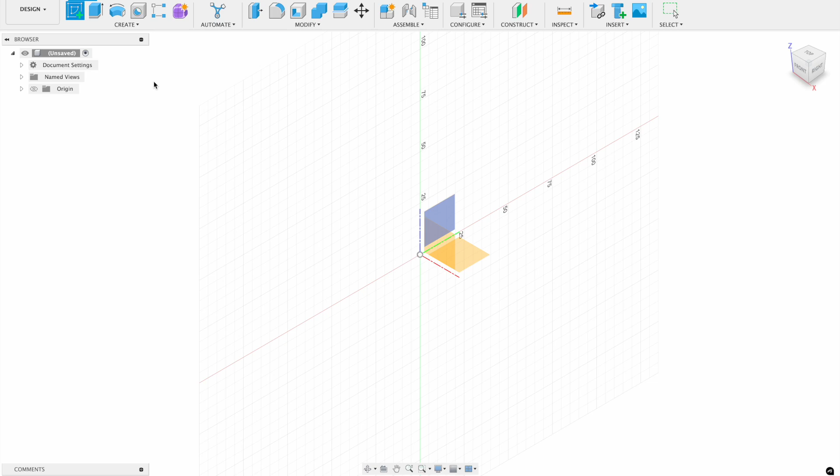So what we'll do is in Fusion, we will start by clicking the Create Sketch, and this time we'll select our side plane right here.

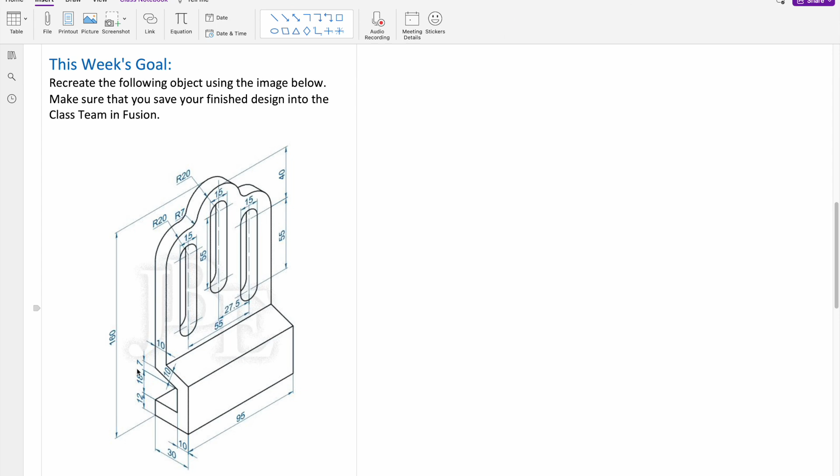Now what we want to do is using the Line Sketch tool, we want to start by just sketching this little profile right here. It doesn't have to be perfect just yet. We can come back in and add the dimensions that we need. But we'll start by just kind of starting at the top, goes down, comes down at a slant, and then makes this funky looking little shape right here.

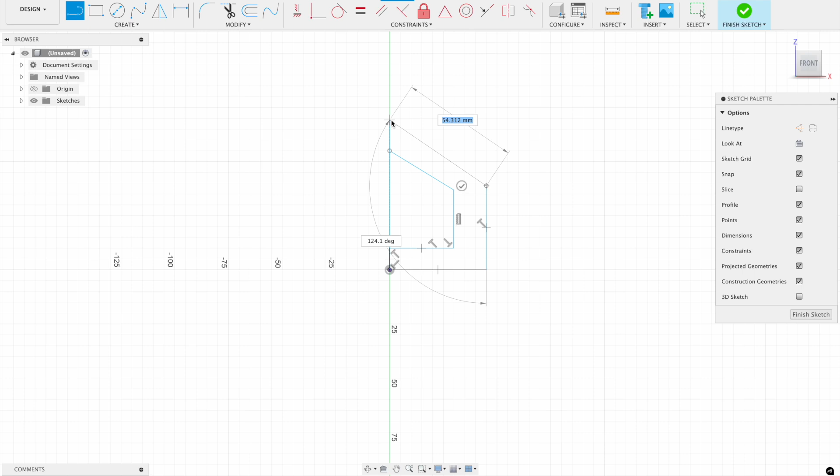This isn't perfect to the design by any means, but we have a good frame of reference to start. So if we're looking at this picture here, we see we have some dimensions along our side: a 12 from this edge to this edge, an 18 from this edge to this corner, and 7 from this corner to this edge right here.

So the first thing we actually want to do is lock this corner to be in line with this edge. To do that, we could start with the construction line and make sure you click in the bottom left portion to anchor the line.

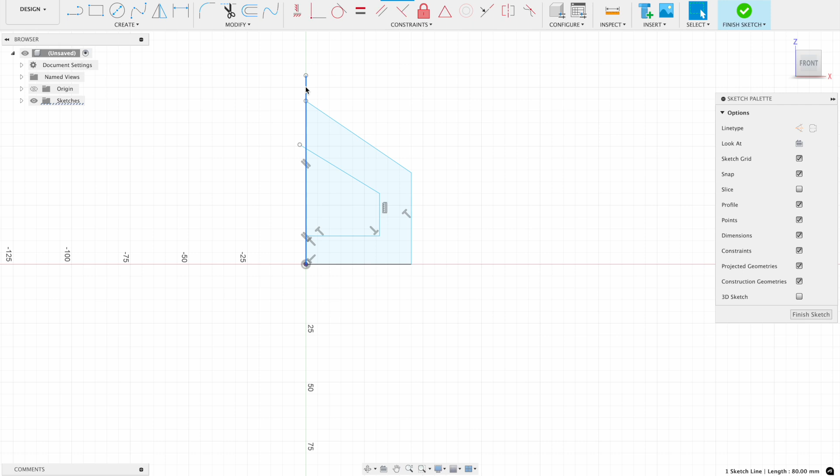Now you see we have a fully defined line here, but we're actually going to make this a construction line. We'll click here on the line and then press the X key on our keyboard to turn it into a dotted line. Then we could use the coincident constraint to lock this portion of our line. If we click on that dot in this line, we'll see that they snap together. So now no matter what dimension we put in, this line will always be snapped to our little reference line that we made.

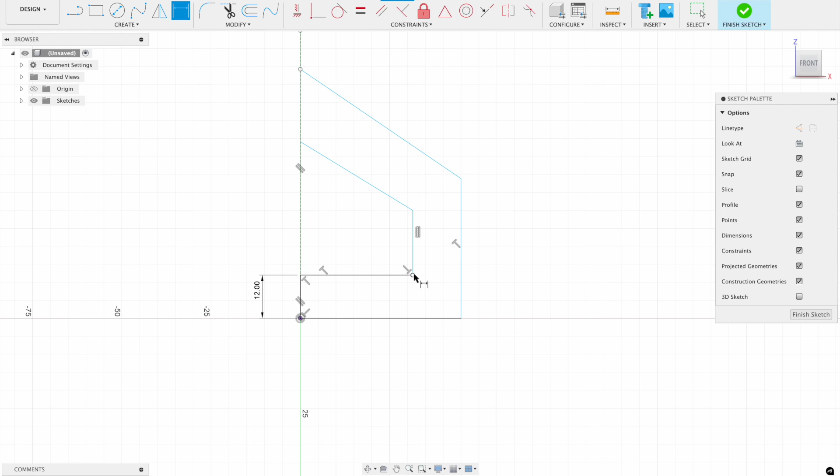Now we could come back in and add our dimensions that we need. We saw that this dimension from here to here was 12 -- we already have that in. This dimension from here to here was 18. And from this dimension to this dimension, we can come back in and just make this 7. Now you see the angle adjusted, but our distance from this corner to this line stayed the same.

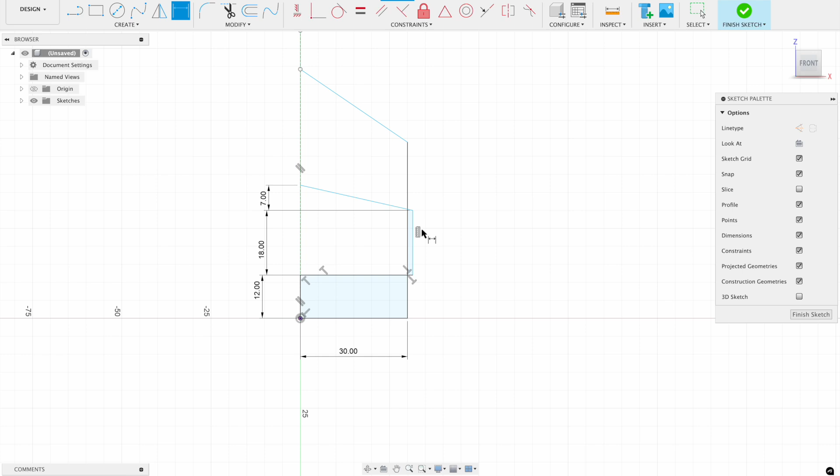So what we can do now is come over to our bottom portion of the line. We can see this entire length is 30, and this little section of the L is just 10. So we'll make from here to here 30. That kind of messed up our shape a little bit, so before we do that, we will come back and delete this dimension, and just adjust this to make this dimension 20 to start. Now when we come back in and make this 30, it's a lot easier to reference that.

So the last thing we need to do is give these lines here their correct spacing, because right now these look way off from the way they're supposed to be. First we'd want to add a parallel constraint to these two lines -- we could see visually that these two lines, since they have a dimension of length in between them, are parallel. If these dimensions were at different angles, they would have an angle dimension there instead of a distance. So we could come in and add a parallel constraint to these two lines.

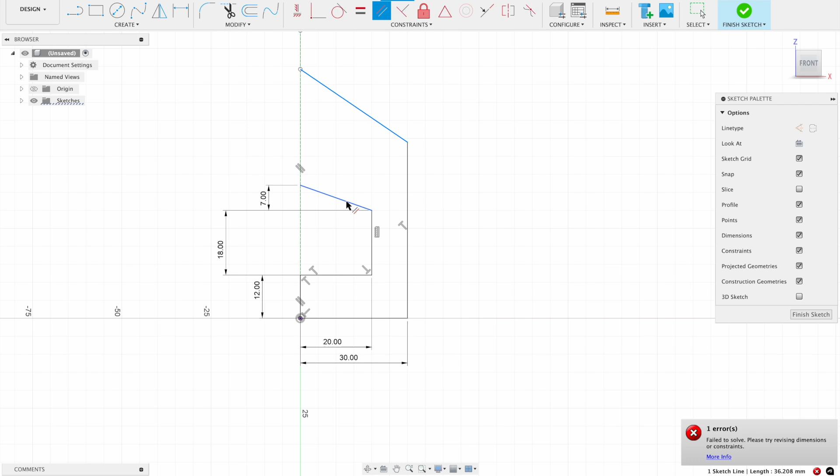Then we can come in and lastly just add a dimension from here to here, making sure we get our dimension at that slight angle and make this 10. Now you see we've kind of got this little jut out, but that's okay, because what we can do is just draw an arbitrary line from here to this little corner to close off our shape.

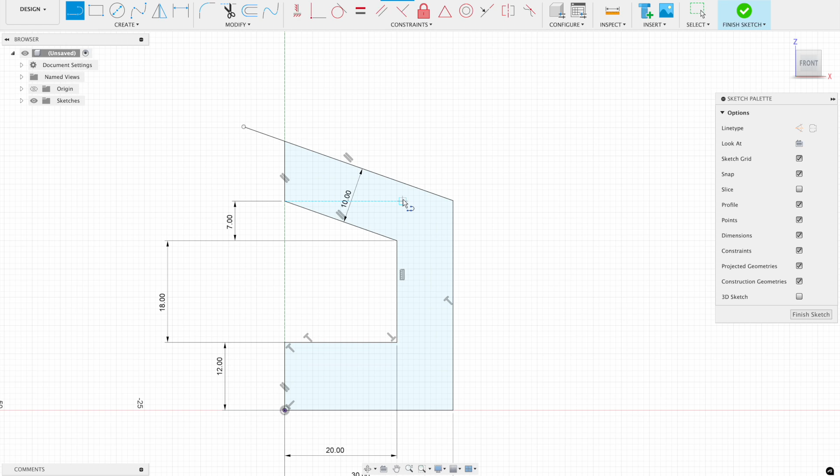Okay, now we have a fully defined shape, and we can come in and actually use the trim tool here and modify it with a little trim.

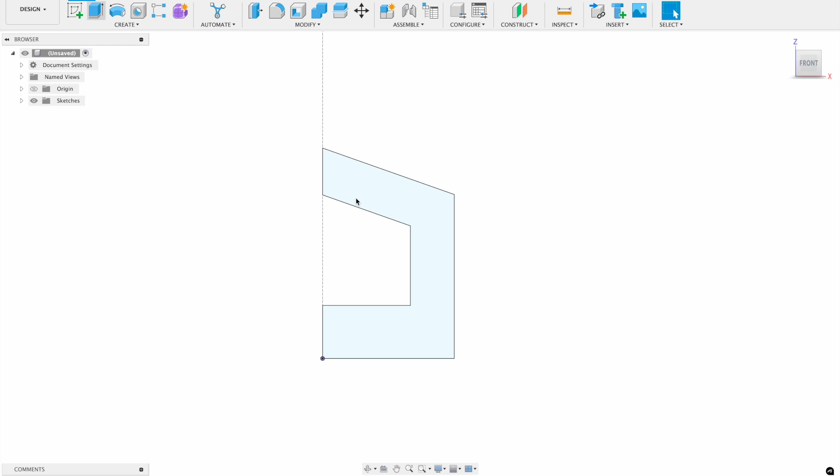Now we have the exact shape for our thing fully dimensioned out, so we are good to do our first extrusion. We'll finish the sketch, and if we look back at our drawing, we see that this whole thing gets extruded out 95 units. So we'll click on extrude, click on this little guy here, and extrude that out 95 units. That's the first part of our object.

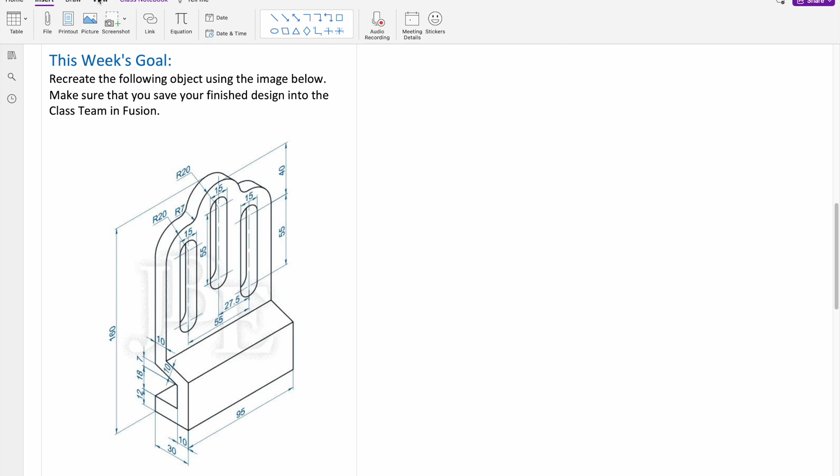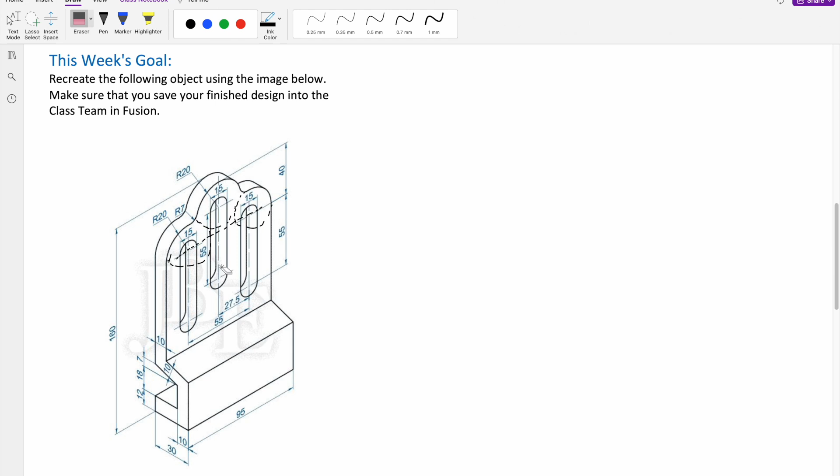However, now we have this second portion, and it looks a lot more confusing. But we can actually get this all created in just one sketch. It'll take a little patience, and we have to know the right place to start. If we look at this, we can almost see a couple of circles and a rectangle. If we envision a circle here, a circle here, and a circle here, we can draw this in Fusion starting with those simple shapes and then create the more rounded corners and holes later on. That's exactly how we're going to start this.

So I'm going to start in Fusion by creating a sketch, and I'm going to look at the back here and create my sketch right along this little surface right here.

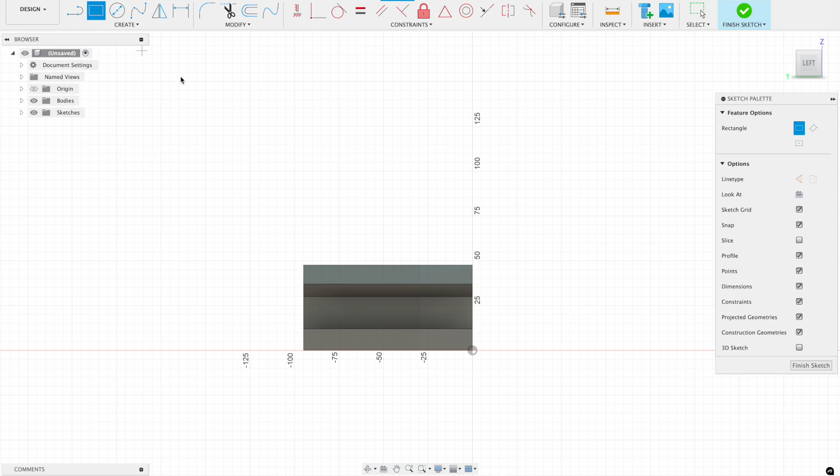Again, I'm just going to start with a rough estimate of that shape. I'm not going to worry too much about getting the dimensions right, but I do want to start my rectangle from this bottom left corner and then go up some amount. We can actually figure out exactly how much we want to go up. We want the base of our rectangle to be in line with the bottom of our circle here.

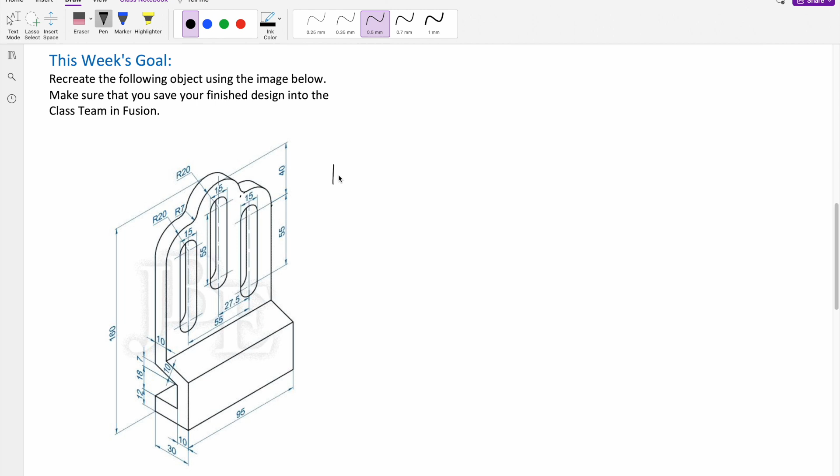So how we can do that is by a little bit of math. This entire thing is 160 units up. From the tippity top of the part all the way down to where we want to start our rectangle is 40 units. And we've defined that this corner where we started our rectangle is a total of 37 units up. So to figure out the height of the rectangle, we do 160 minus 40 minus 37, which gives us 83. So we want to make a rectangle that's 83 high, and it's in line with our bottom, so it'll be 95.

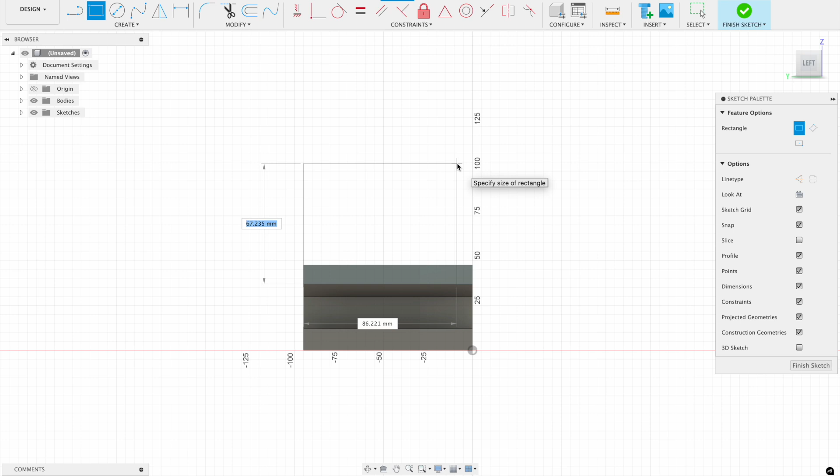So we'll do our rectangle, 83 units by 95 units. The way I did that is I typed one number, pressed the tab key, and then altered that second dimension box. Okay, so now we've got our rectangle. We've got a good start.

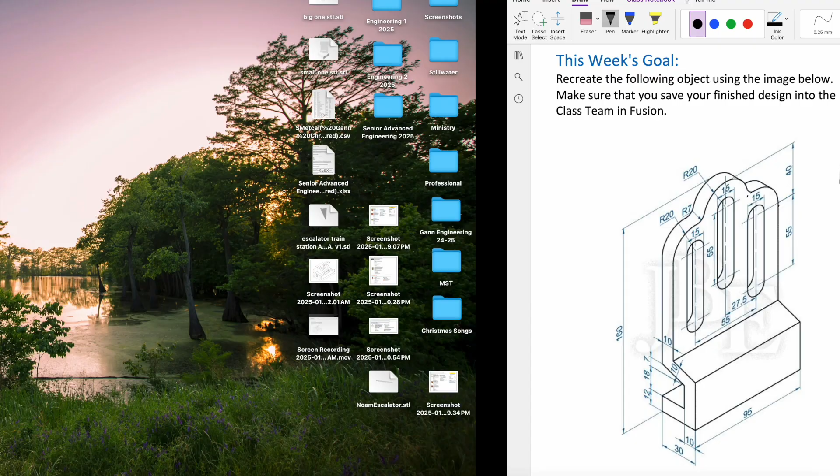To get these circles in, we'll start by drawing a couple of circles at the corner, and then try to get one dead center there. We see that each of these circles has a radius of 20, or a diameter of 40. So we could start with a circle, make sure we get that tangent constraint there, and then the same thing from here to there. Then we can come in and make these two 40. That one was lucky and we snapped right to it. This one we did not, so we can change the dimension to now be 40.

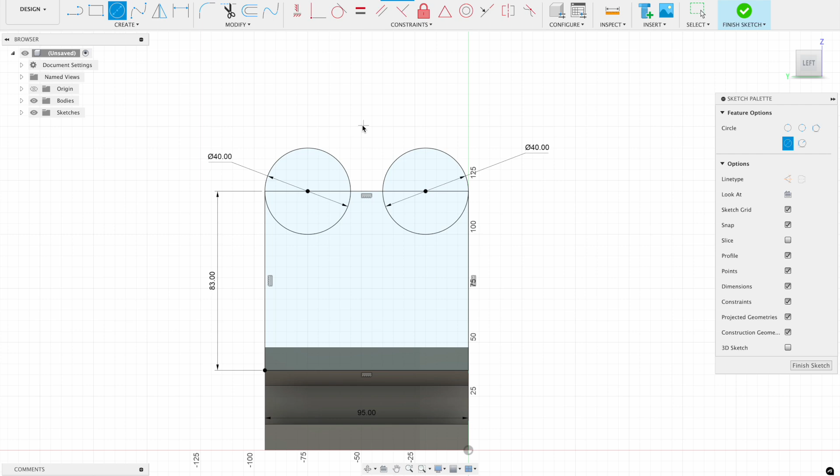Then we want to create a third circle in the dead center. This one is slightly elevated above, but we see that it's a circle of radius 20, and that it's 40 millimeters from the top. So for that rectangle we drew, we just have to make sure the bottom of our circle is in line or tangent with the top of our rectangle.

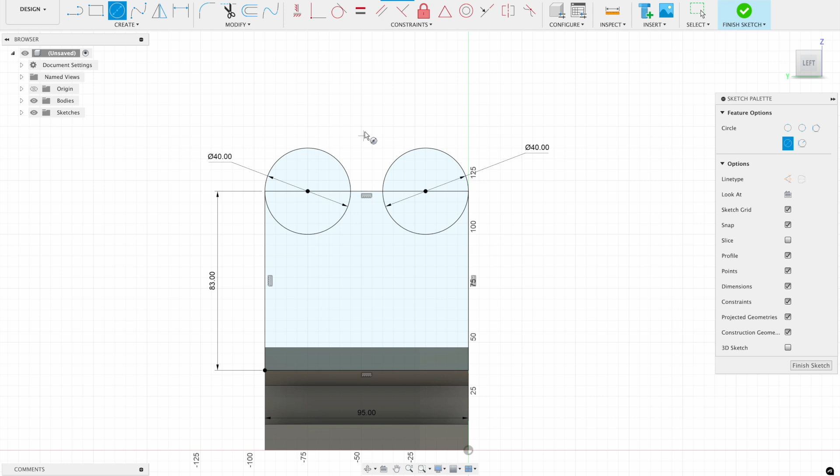So we'll start by doing just that. We'll start with a circle that's 40, and then come in and use our tangent constraint to make this circle tangent with that line. Now we have a circle that's tangent with the line. We just have to make sure that it's actually centered.

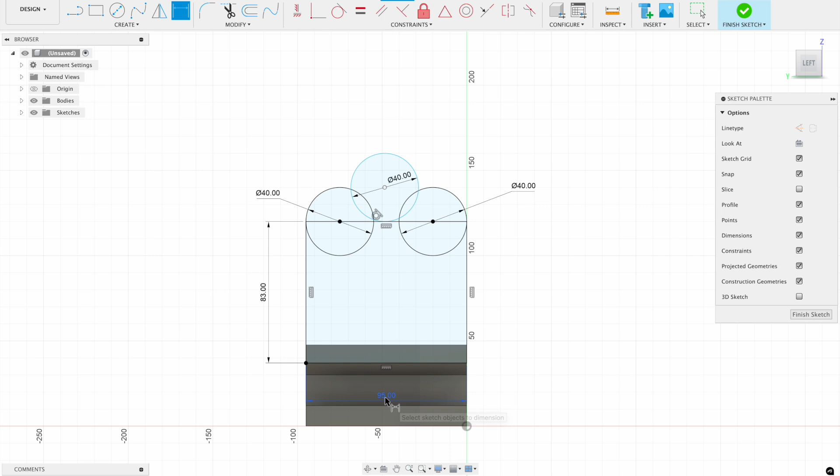To do that, we would just have to divide 95 by 2. And Fusion can actually do that math for you if you don't feel like doing it. So you could just type 95 divided by 2, and Fusion will automatically calculate that out to 47.5.

Now that we have this rectangle with the 3 circles, we're starting to see this all come together. We just need to get in our last little cutouts there. To do this, we'll create these by having 2 circles and a rectangle surrounding it in the correct dimensions. Something we could look at is that this top circle's center is actually in exact reference to the center of this circle that's a diameter of 40 that we just drew for all 3 of these.

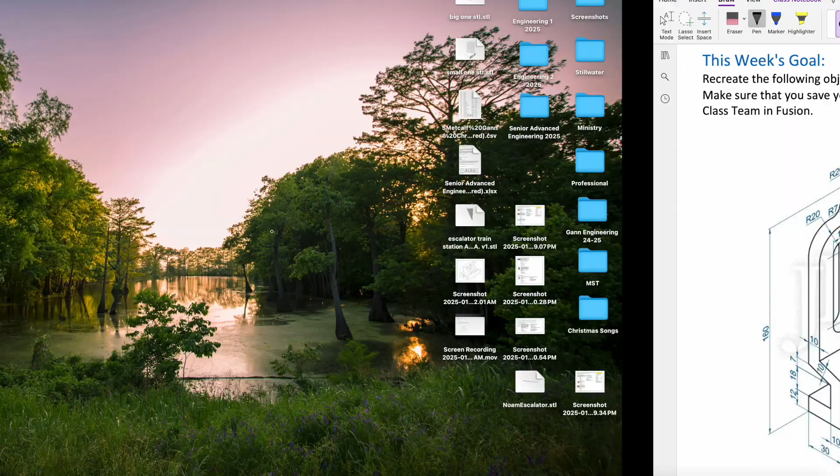If we go to our Fusion model, we can create another circle, and all of these were a diameter of 15. We'll start with one circle that's a diameter of 15, then we'll do the second, then the third.

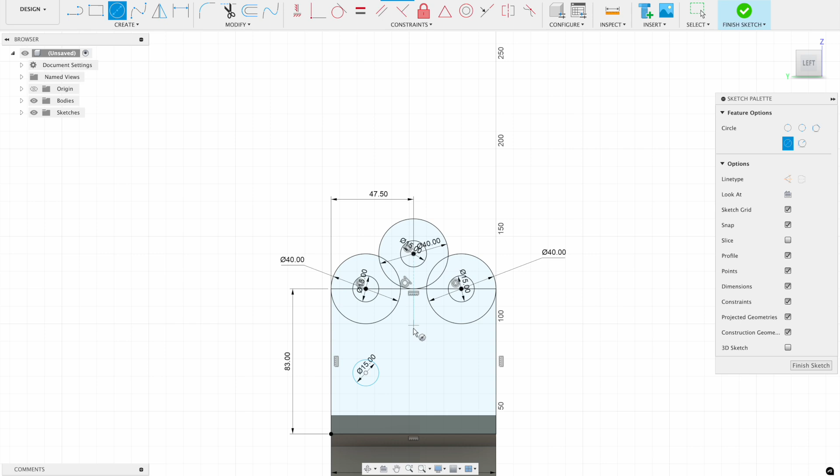Now we can create a second circle directly in line with the first one, just slightly below it. This one also has a diameter of 15, so we'll add another circle with that dimension. You could center the circle and trace it down. Fusion will automatically keep your mouse right in line with the center of the circle, which is very convenient when working with multiple features of the same dimensions.

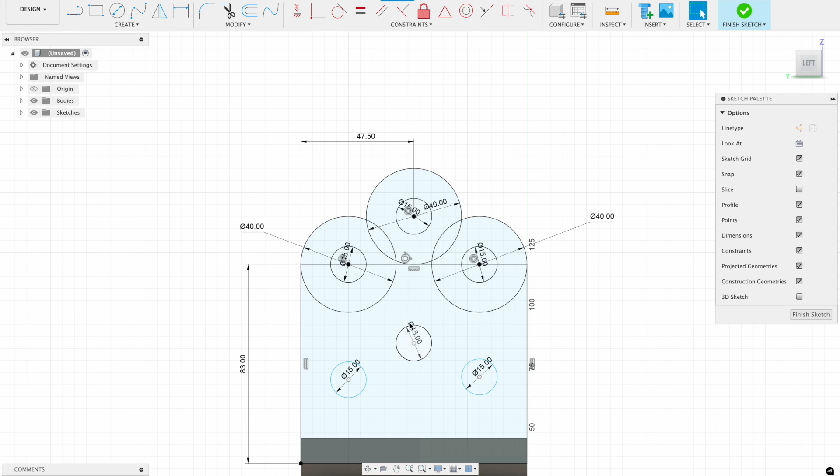Now we've got our circles that are 15, but they're not exactly in the right space. Looking at this, the centers of each of these circles are 55 millimeters apart, so we'll add our dimension tool of 55 for all 3 of those circles.

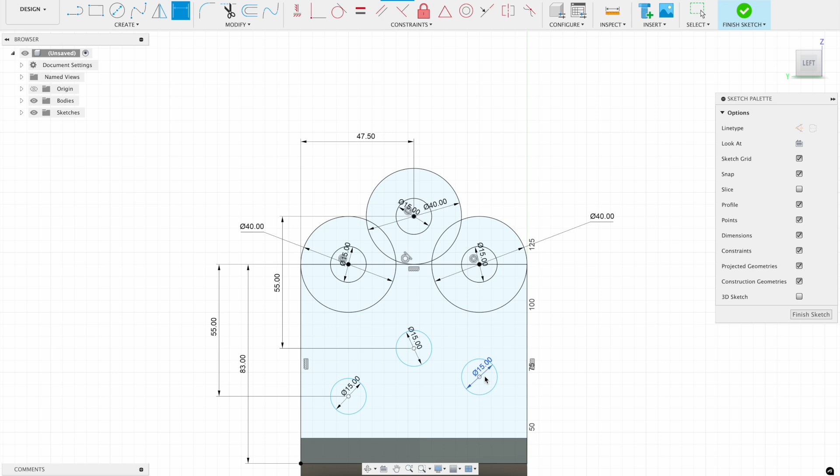They're still not fully defined, so we also need to give these the correct dimensions side to side. From the center of these 2 circles it's 55, and assuming we did this correctly, that should automatically be the dimension—55, which it is—and then from this one to this one is 27.5.

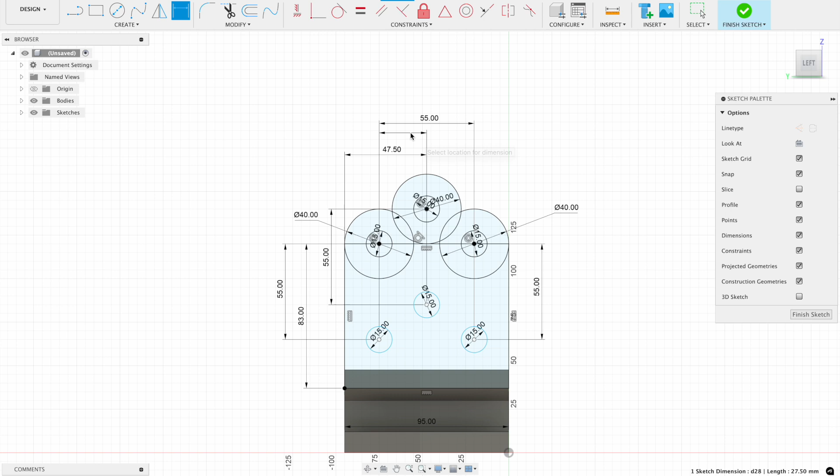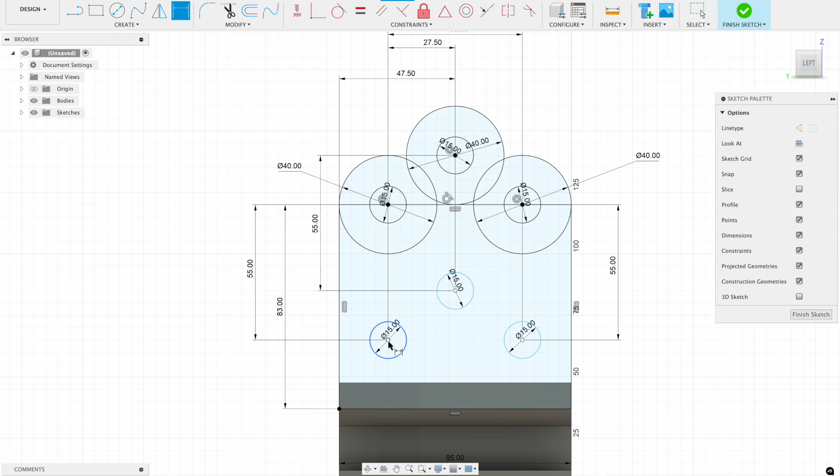The last thing we have to do is add one more dimension, locking this to this edge here. To find that, we take 95 minus the 55 we already have, and whatever is left over we divide by 2. So 95 minus 55 is 40, and divide that by 2 is 20.

If I go from this circle to this side, we put in that dimension of 20, and even though we already spaced them out correctly, now Fusion knows they're locked in place, so we can see that everything is fully defined.

The last thing we have to do is create some lines that are tangent to those 2 circles to close out this little cutout shape. We can grab our line tool and create a couple of lines that are tangent with that circle. If you do it correctly, you can create 2 tangent lines directly.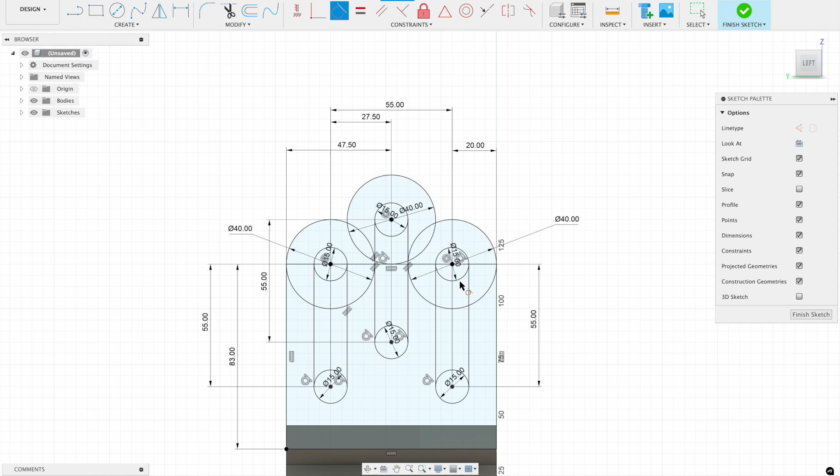If you see this little symbol right where my mouse is now, that automatically adds the tangent constraint. If you wait until that pops up before clicking, you'll create the lines without needing a separate tangent constraint. However, if you miss and click somewhere else but still want it tangent, that's okay—just grab the tangent tool, click on each of the circles, and it will constrain them.

So now we see that we have this full, complete shape. We're pretty much there—we can go ahead and extrude this and create our final thing. So we'll finish the sketch.

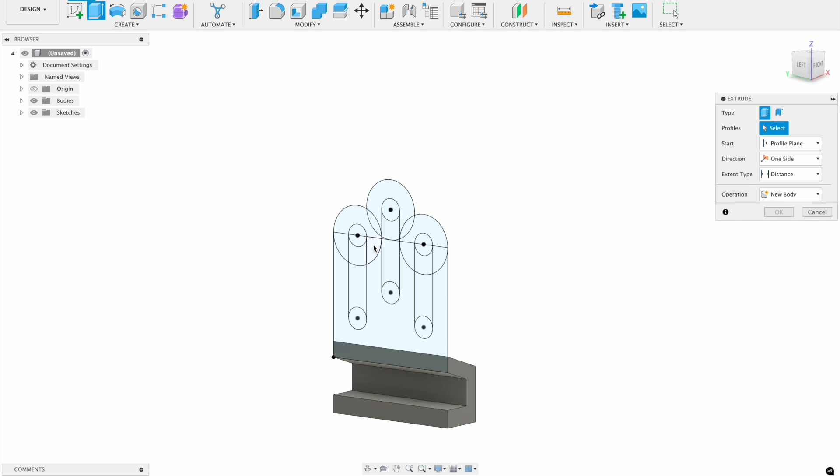We'll then go over to our extrude tool, and we're going to have to select a couple of bodies here to make sure we get everything we want. We want to leave these 3 holes cut out, but we want everything else to be extruded. So we'll click through all the things we want extruded.

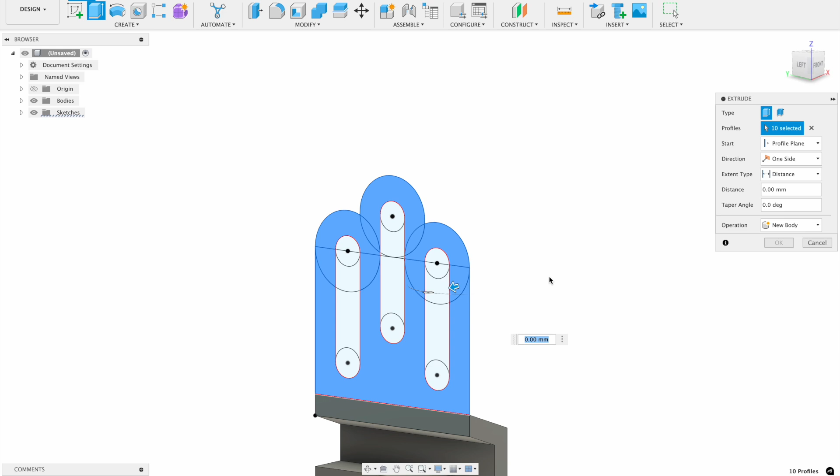Everything here looks good, this is what we want. We actually do also want this bottom rectangle too—this bottom rectangle is going to be important for the extrusion, and you'll see why.

If we look at our part, we see that this gets extruded by 10, and remember we referenced it from this little corner right here. So we want to extrude going this way. To do that, we could just click our arrow and drag it 10 millimeters this way.

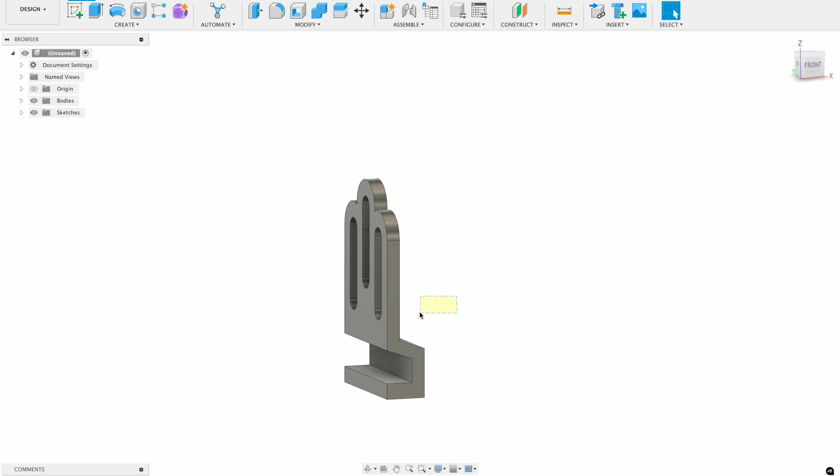You'll notice Fusion detects that there's geometry here already, so it automatically sets our operation to cut. What we'll have to do is manually change our operation to join, and now we have this fully defined model. Once it loads, we're looking pretty close to our final product.

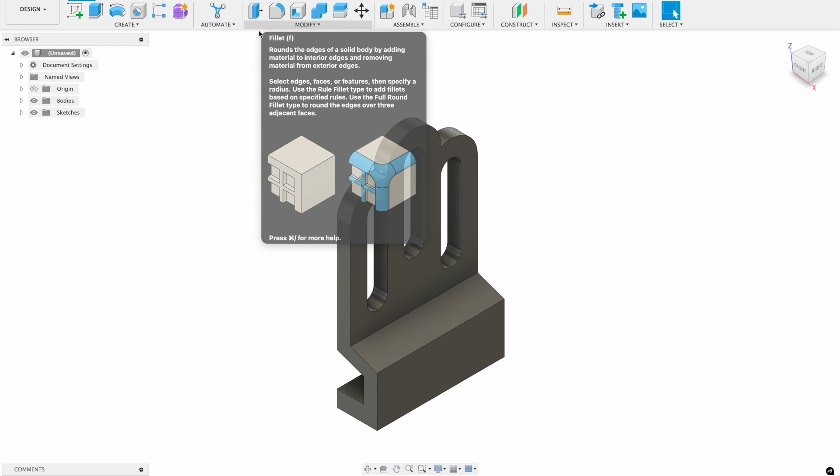We're only missing one little feature, and that is these little curved edges right here. We can come in and use the fillet tool in Fusion—if you go into your modify area, it's right here and super easy to use. You just click on the tool, click on the vertice you want to change, rotate the part around, click on the other vertice, and we see it's got a radius of 7. All we have to do is type 7 in that dialog box, and that's it.

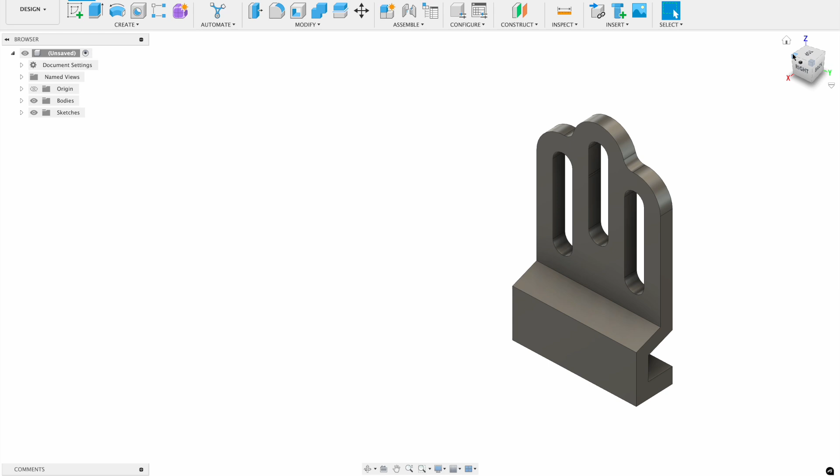That is how you create this part in Fusion 360.